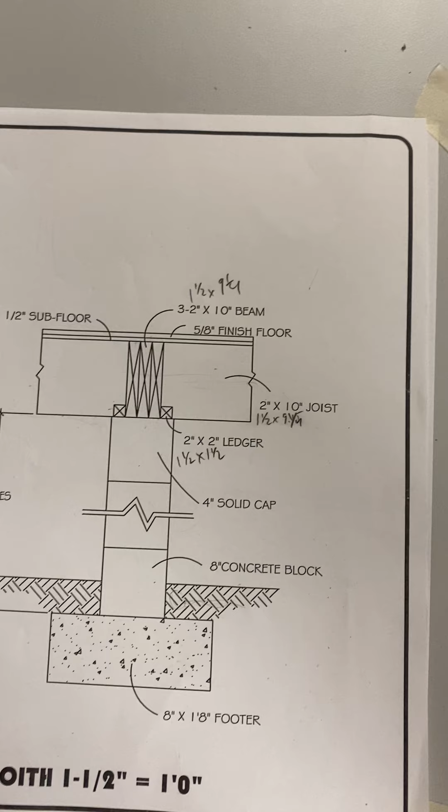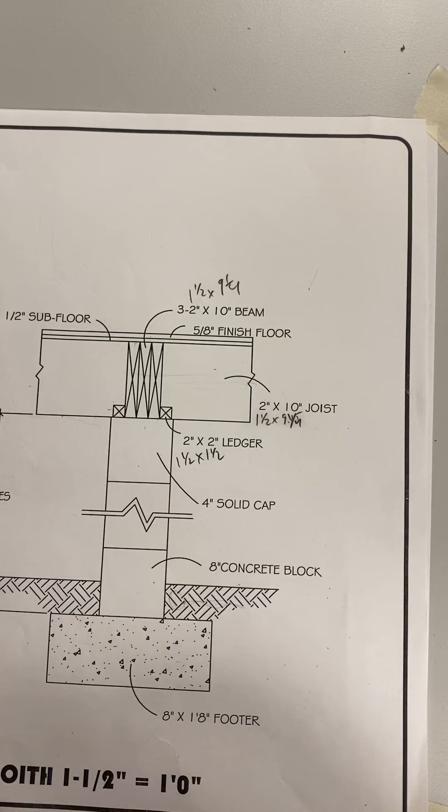So here's the basic overview. Number one, this is drawn 1 1/2 inch to a foot. So you will use, find it here, there it is, this side of a ruler right here, okay? Now, lucky for you, this matches up to exactly 1 1/2 inch to a foot.

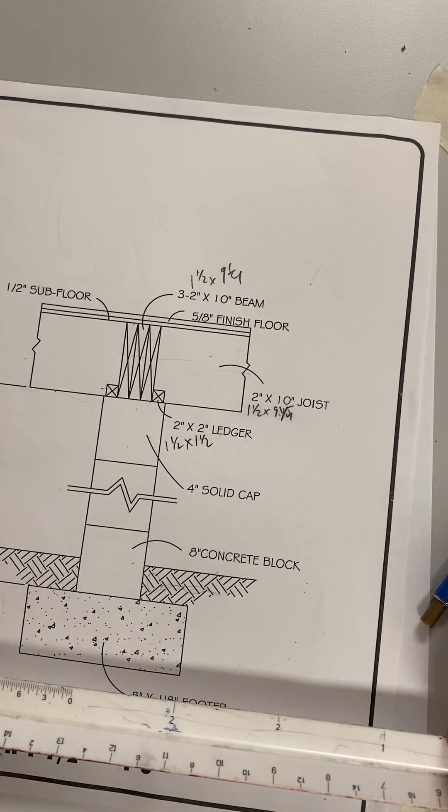So this is scaled. For example, this says this is 1 by 8, correct? We're all agreeing with that. This is 8 inches by 1 foot 8 inches. And if I measure it, it is exactly 1 feet 8 inches. Remember, this 2 is actually a 1 because this is referencing a 3-inch scale, so this is 1 right here, if you do not remember that, okay?

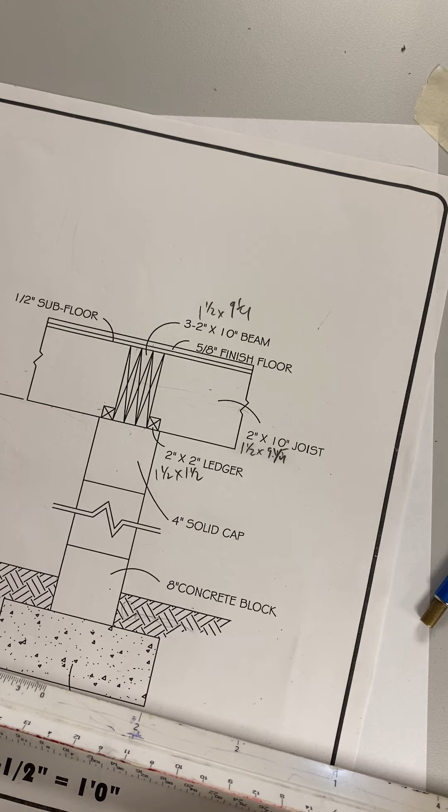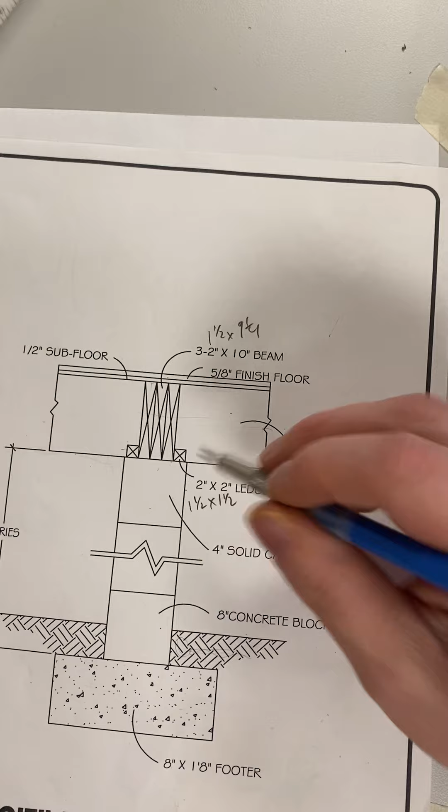Second thing is this: some of these things are not what they seem, okay? In the world of construction and architecture, a 2 by 4 is not really 2 by 4. If you measure it, a 2 by 4 is actually 1 1/2 by 3 1/2. So with that being said, if you measure this ledger right here, you will see how this is actually 1 1/2 inches.

So this is 1 1/2 by 1 1/2. If we're referring to a joist, this is actually 9 1/4 inches, okay? These are going to be 1 1/2 inches wide.

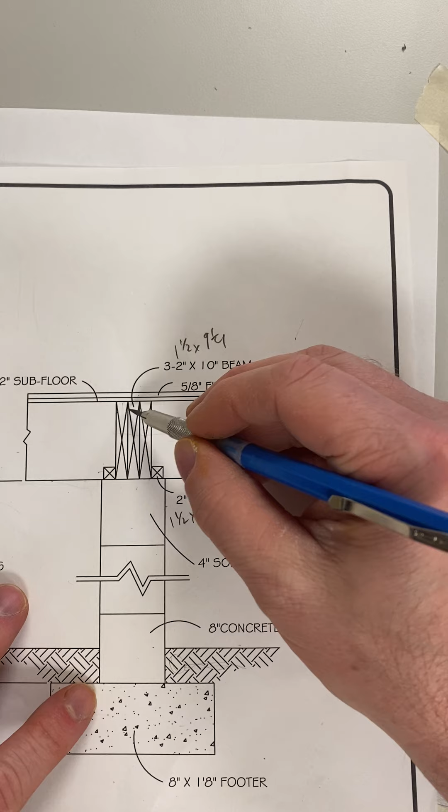So worst case on this drawing, you could reverse engineer it. In fact, you could actually lay it underneath your paper and get the point on that one and almost trace it out. Here's the goal: I don't care about the little hatching right here, that doesn't matter to me at all. We're going to draw this out and label it.

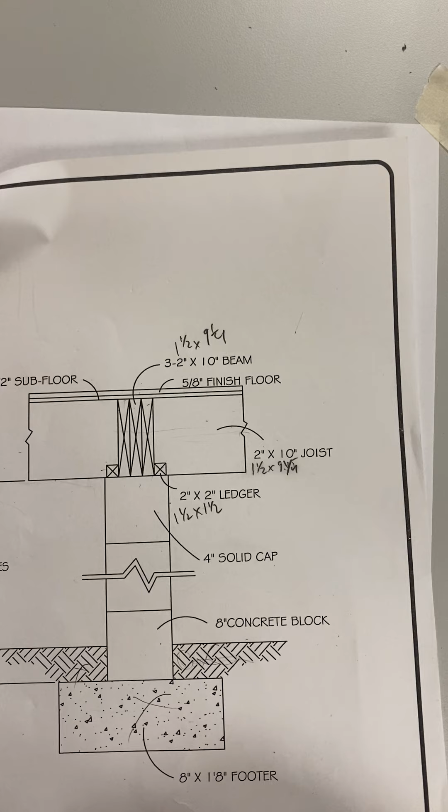So I'm going to do this with you, and hopefully this will help guide you through this. Or if you're like, Royth, I got this, I don't need your help, do it, turn it in, we'll be good. All right, so here we go.

So first thing I'm going to do is start off with this footing, which is 8 inches by 1 foot 8 inches. So let me get everything set up here, do some stuff on my desk. Here's what I'm gonna do first.

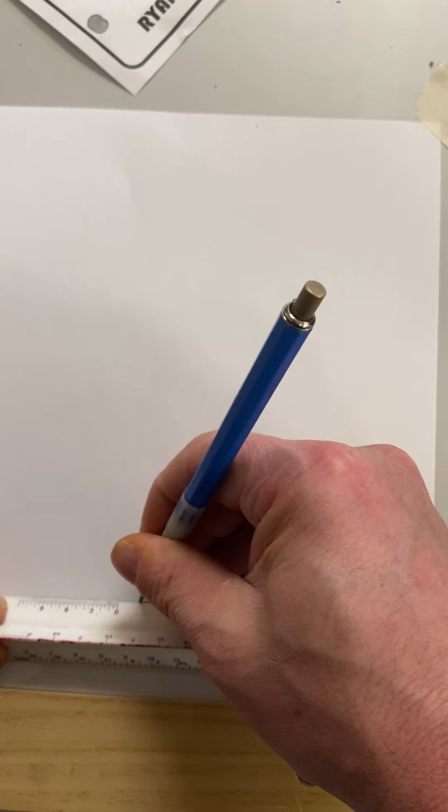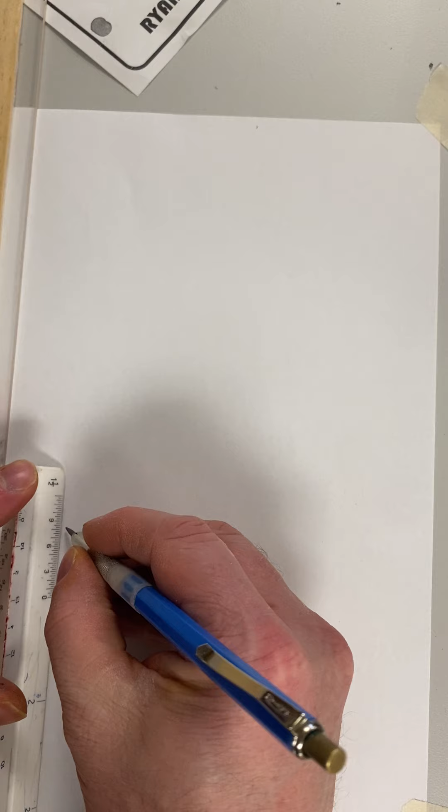You can see this on my phone, yes you can. You're gonna draw a line 1 foot 8 inches first, okay? Go ahead and rotate that with your T-square, and you're gonna go up 8 inches on each side. So there's 1, slide it over, reline it up. There is 2, we're good there.

All right, go ahead, draw a line straight across. It should be about accurate. If it's a tad off, you see my leg kind of got up a little bit there, that is fine, I'm not gonna worry about that. In fact, I'll take my eraser shield and we'll pretend that it's all perfect, and it is. Yep, I got it right the first time, it's 8 inches.

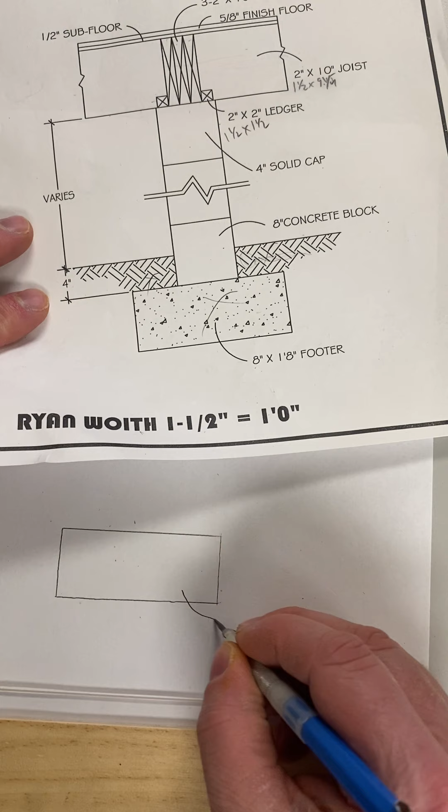So we're good there, okay, so you got this first block done. And if you want to make your life easy while you're doing this, you can go ahead and label it as you go along through it. That way that process is done and you don't have to remember to do it afterwards. Also, the point of this is to learn what's inside of your walls, okay, and what's inside of your floors, or under your floors for that matter.

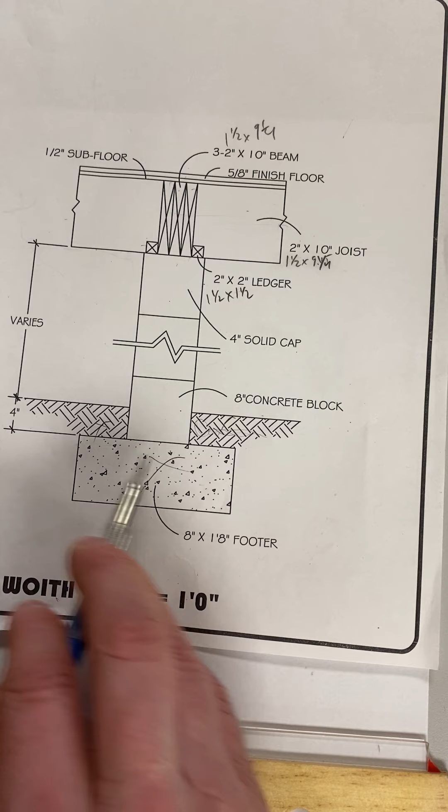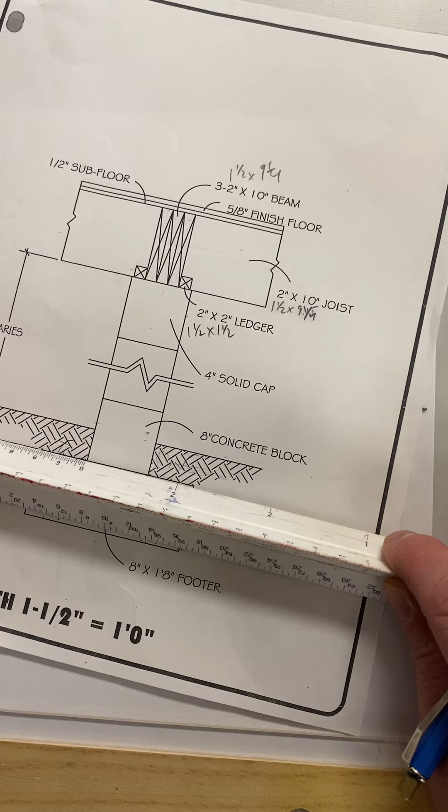Okay, next we need 3 of these 8-inch concrete blocks. Now these are squared, so it's 8 inches by 8 inches. And we have to center them because this is a footing and these are the walls, and they're always centered on the footing, okay? All right, so I know that this is 6 inches going in, and if you doubt me, double check it. I know you don't doubt me, but I just want to show you just so we're on the same page. This is 6 inches long, and this is 6 inches long, so it's centered.

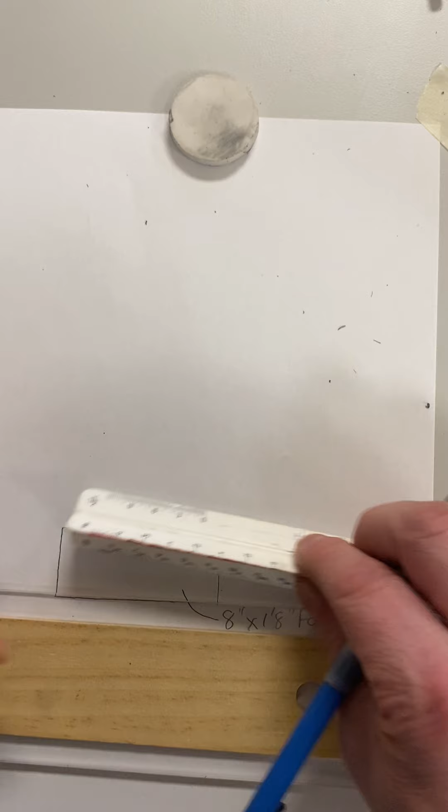So here's what I'm gonna do next, get too many things around here. I'm gonna measure in 6 inches, I'm gonna put a little mark. Measure in 6 inches, I'm just gonna put it on the 6 there and go 0. Same thing, do it backwards. Okay, if I measure here, this is 8 inches, and guess what, it is. All right, so I'm gonna go up 8 inches.

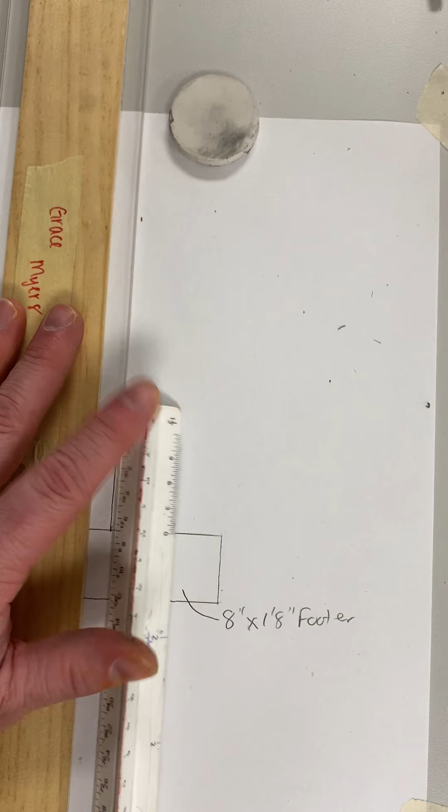Okay, go over here. Go 8 inches up. There you go. All right, take that.

Seems like I go long on the right side. I don't know why that is. There we go. This one doesn't really matter.

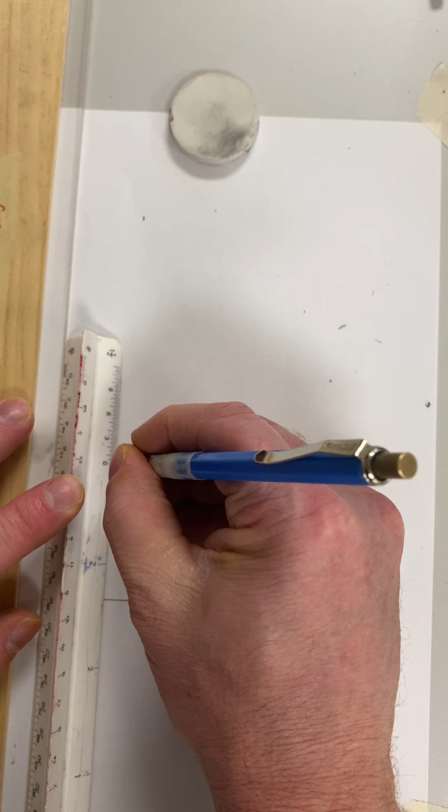So, rinse and repeat, do it again. But I'm gonna do this one a little different because I just want to speed through this a little faster. So, line it up on the 0, go all the way up to the 8. I'm just gonna put a little mark right there, and do it again, just to save myself a little bit of time. That way I know where the top of those things are at.

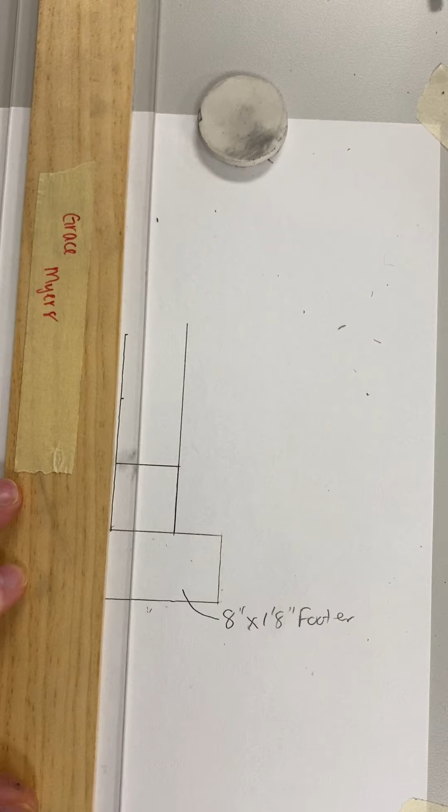Okay, now I'm gonna draw this line up. I will probably have to erase because I'm gonna eyeball it up here, but I'm okay with that because I will save time. Boom and boom. And I never mind erasing, so I will erase this top. And this thing is now rolling pretty good.

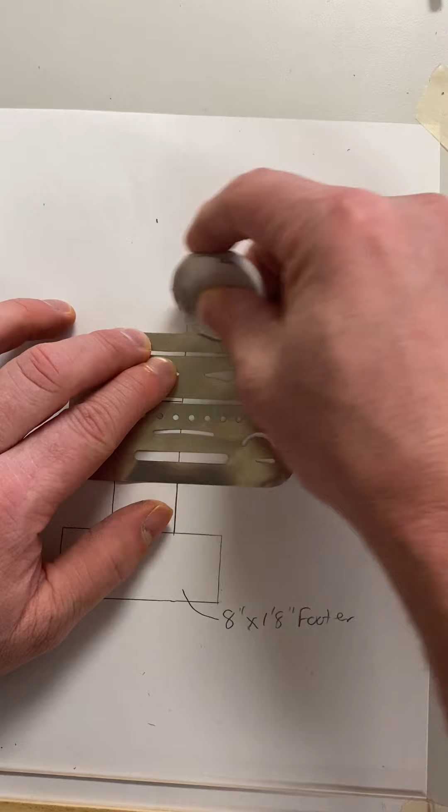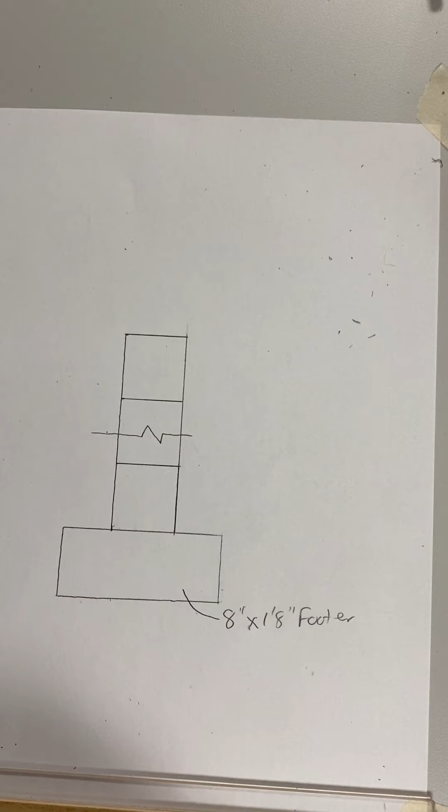Okay, now looking at this, there's this break right here. So I'm not gonna worry too much about the perfectness of the break, we're just gonna put one in here. So breaks can look many ways, but they mainly look like a heartbeat. I'm gonna just eyeball it like that and leave it just like that. Not gonna worry about it being the separation or anything else.

If you want to, you can, if you wanna make it look exactly. It looked better the first time. Good enough, just getting the idea down.

Okay, also we have this right here. This is the ground, also known as the grade. As the grade, I don't know if you heard that or not.

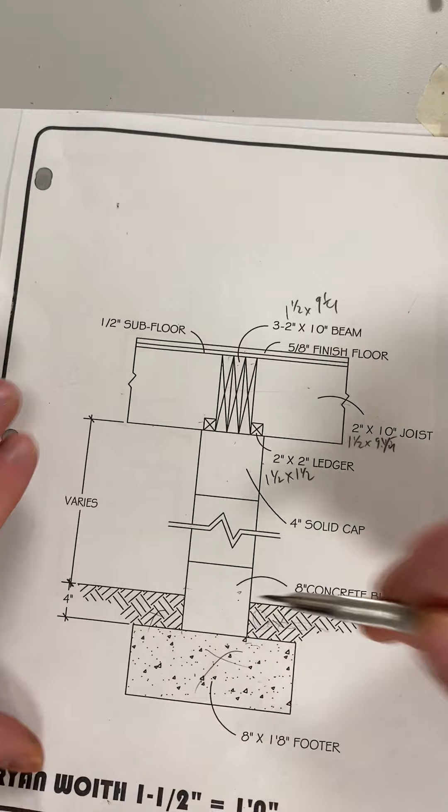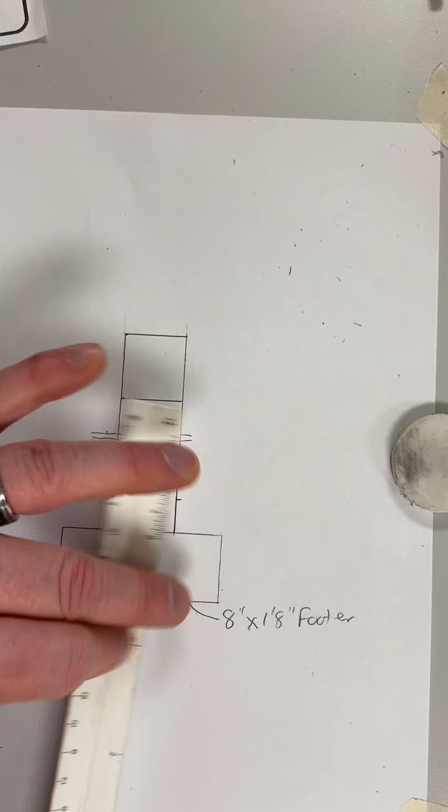So, your next step, 4 inches up from here. Hopefully I'm not going too fast, hopefully you're pausing. Now it doesn't matter how long this line is. I'm just gonna go like this, done.

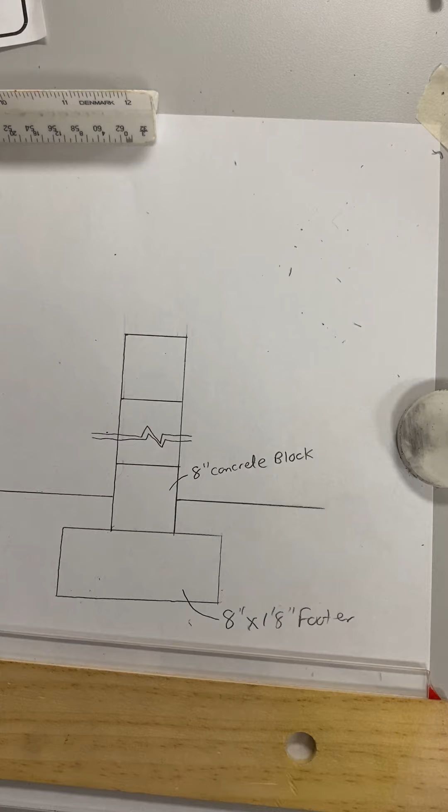Okay, while I'm doing this: 8-inch concrete block. And you better like me because I'm not making you use Gothic lettering, because I'm not gonna do it either. Okay, right here, 4-inch solid cap.

Okay, now we're going to work on what's probably the hardest part about this, which is this right here.

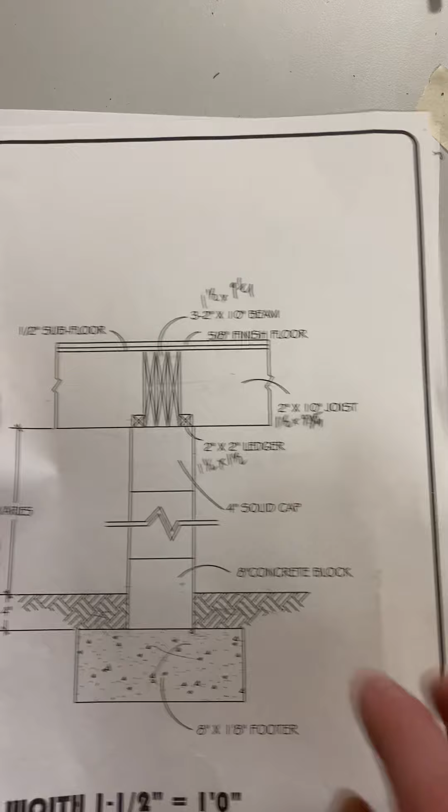So here we go, so I'm going to start with measuring this outside area here first, so that way it looks the same. Now this could go out as far as you want to, it doesn't matter, but I want it to be centered so it's not all over the place. So from here out is about 9 inches.

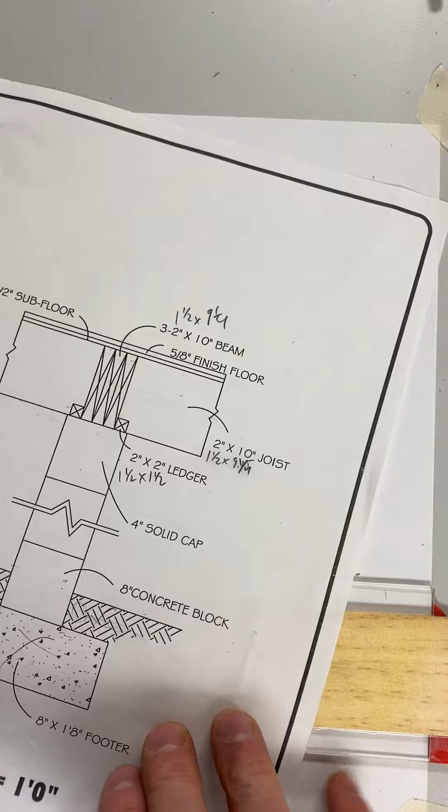I'm gonna go with that. Looks like 9.5, but like I said, it doesn't really matter how long that part is. This is one of the things that it's not that picky about on this one. Okay, line it up, I'm gonna draw a line 9 inches this way.

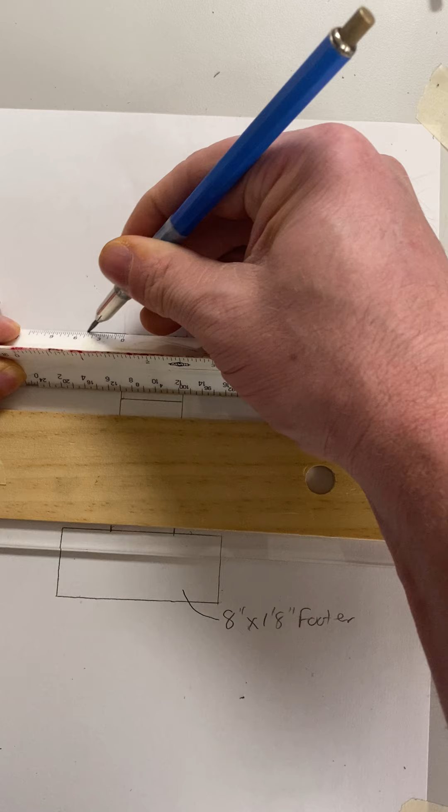Okay, and then I'm gonna go the same thing, 9 inches this way. Okay, so just for reference, I'm gonna put 9 inches right here. That's all for you, no one else.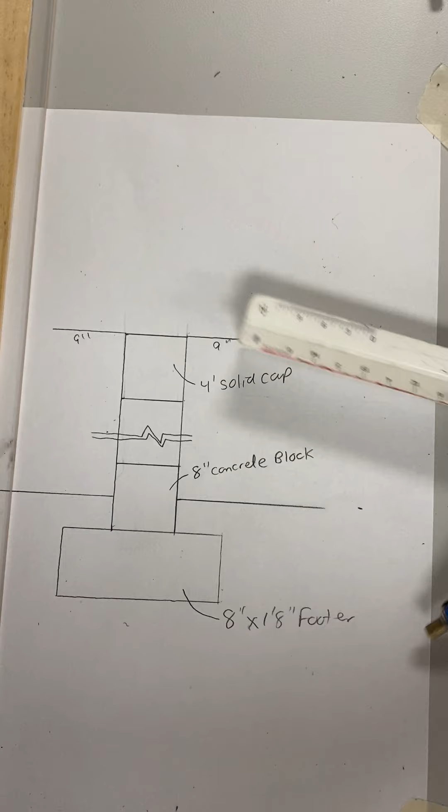Okay, now we're gonna go up. Now I'm gonna do this one a little different so I can put the little squiggly in there, maybe. So this is 9 1/4, okay? Not 10 inches, 9 1/4.

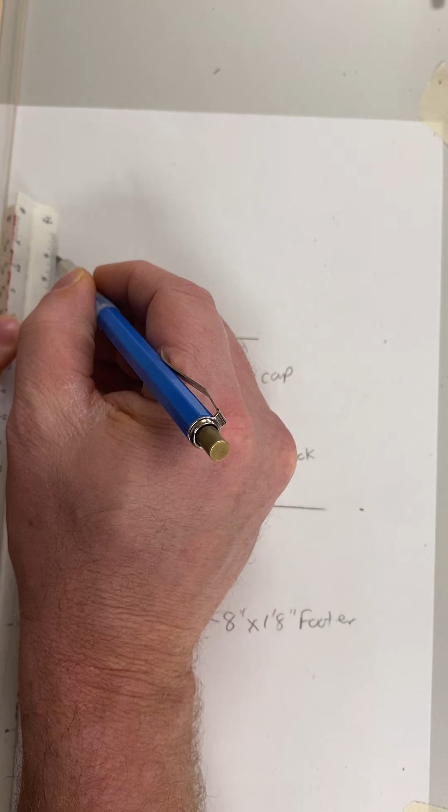So right there, I'm gonna draw lines like this so I can put my little break right there, you see that? Now those match up. Do the same thing on this side, go 9 1/4. Don't know if you can hear it, but the CNC machine's going in the background.

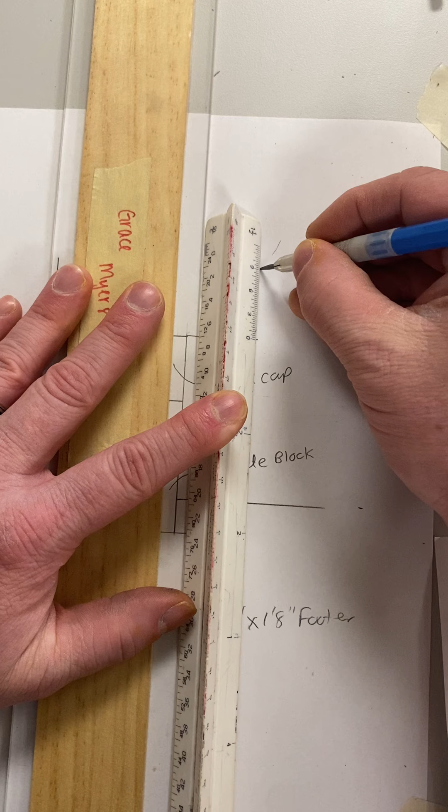Not bad for a Thursday. Okay, I got that straight finally. Draw that straight across, you're doing good. Okay, next thing are these two things right here.

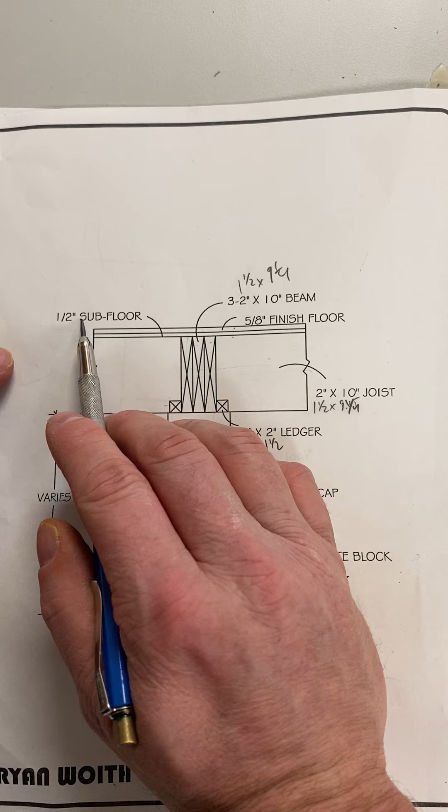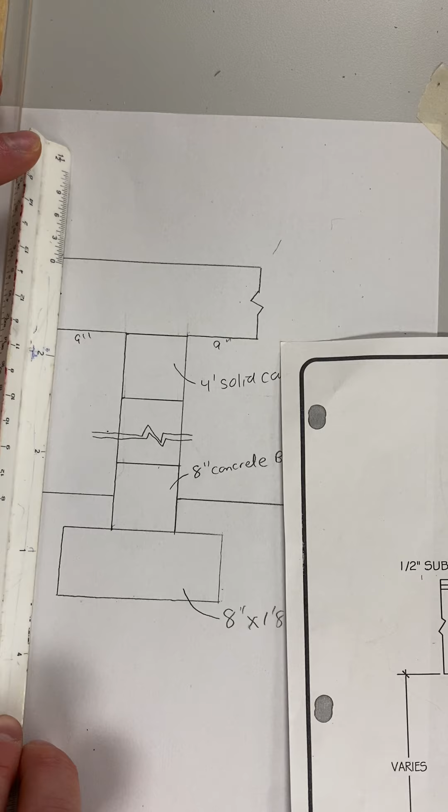Now a 5/8 inch doesn't really exist on a 1 1/2 inch ruler, so I'm just going to make these both 1/2 inches to make my life a little easier. I might try to nudge it up a bit more, but honestly it's not a big deal. The labels are more what matter. So I'm going to make a mark at 1/2 inch. I might try to go a little above the 1/2 inch so I can have a little separation.

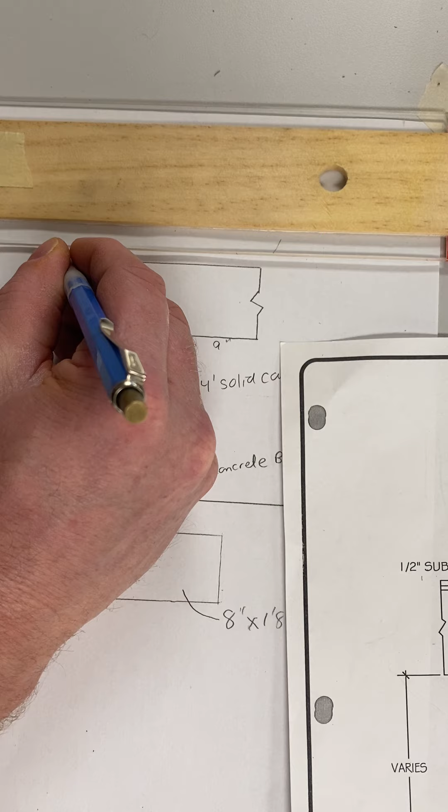So this is going to go up to these, and then I'm going to draw a line straight across. Like that, and like that, and go ahead and join those up here. Okay, looking good, looking real good.

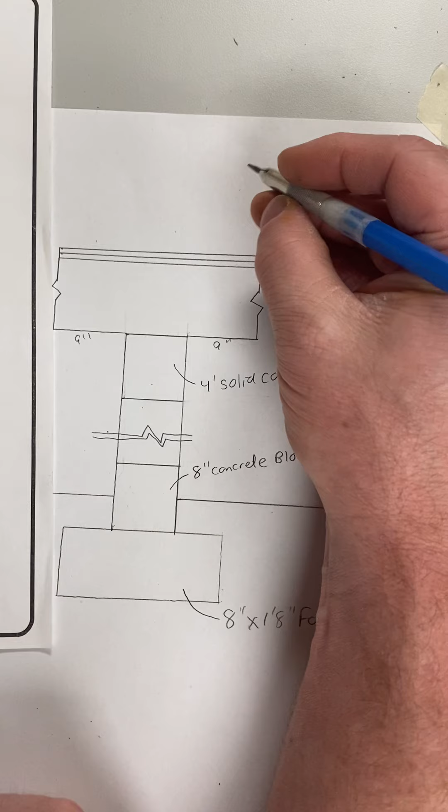All right, so if I want to label it, I might as well do that now. So this right here would be a 5/8 inch finished floor. Remember, you have to label these. Once you start to learn what they are, this here is a 1/2 inch subfloor.

All right, last things are these. Now you might be wondering what the X means. The X is the end of a stud, okay? So if you're looking at a piece of wood, it would be the end of it, not the side. This is the side, this is the end. So you have to put an X to indicate that.

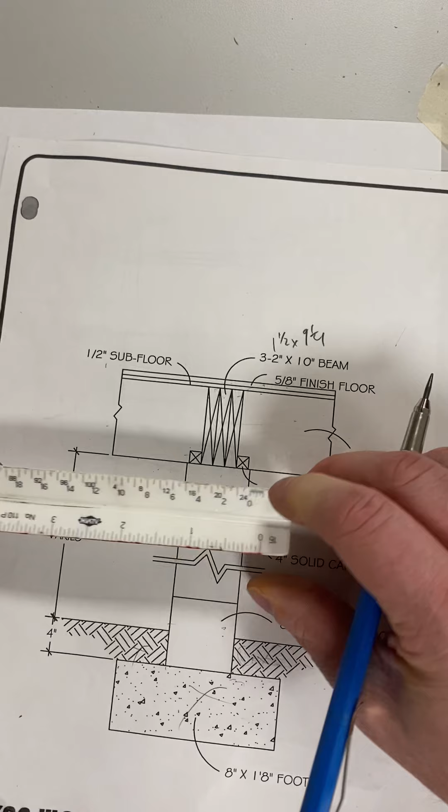Okay, here's how we're going to do this. I'm going to start off, and there's a little bit of a gap here, not a whole lot. I do want to put that in there so it's centered, because if you did it right, it should be centered in there nicely. Of course, this is done on a computer, so it's a little harder. It looks like that is about a 1/4 inch in, so really not a whole lot.

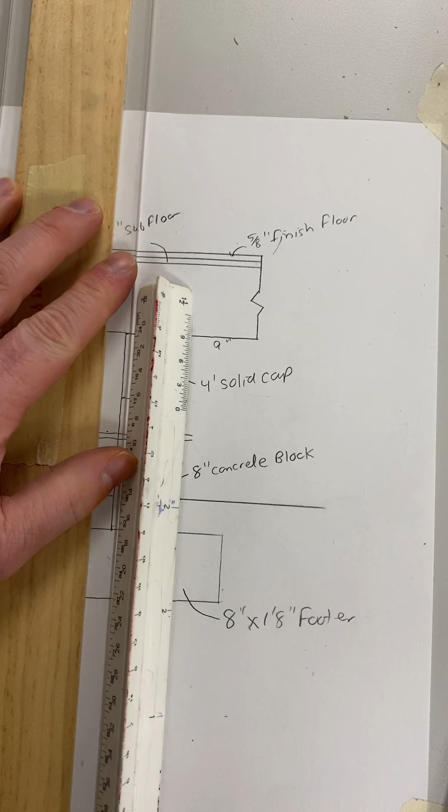So honestly, to make life easier with the thickness of the lead, let's just line it up with this line right here. Because if your lead is any thickness whatsoever, it's going to throw it off a little, so that's fine. So here's what I'm going to do: I'm going to go up here 1.5 inches.

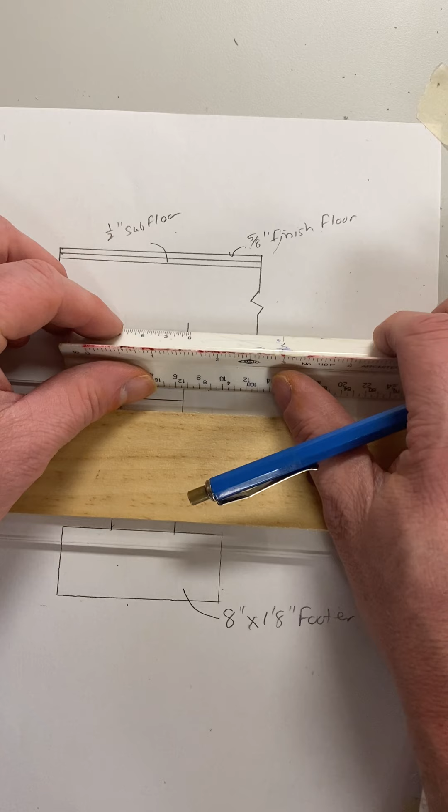Bring that over. Actually, I'll go over now 1.5 inches. Always fun trying to find the side of the ruler. Go over 1.5 inches, because it just takes a smidge to throw that off. Doesn't take a whole lot.

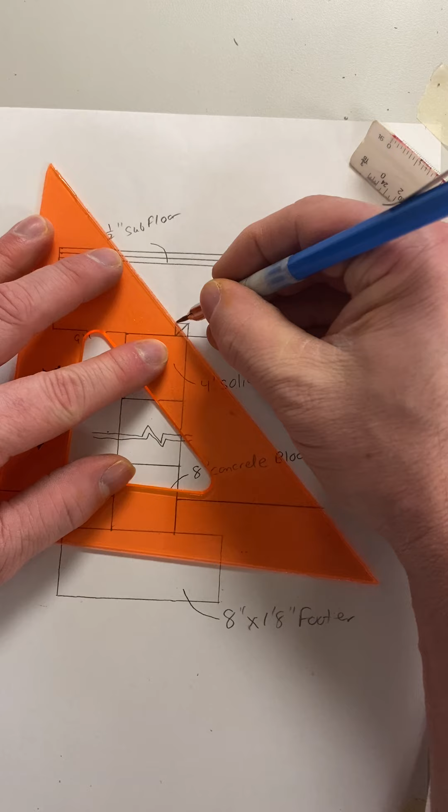There you go. Now whenever you're doing a stud, you have to put an X on it. Why? Because that indicates the end of it. So I like using a triangle because I can see through it, it's very easy to work with. See that? That's how that should look.

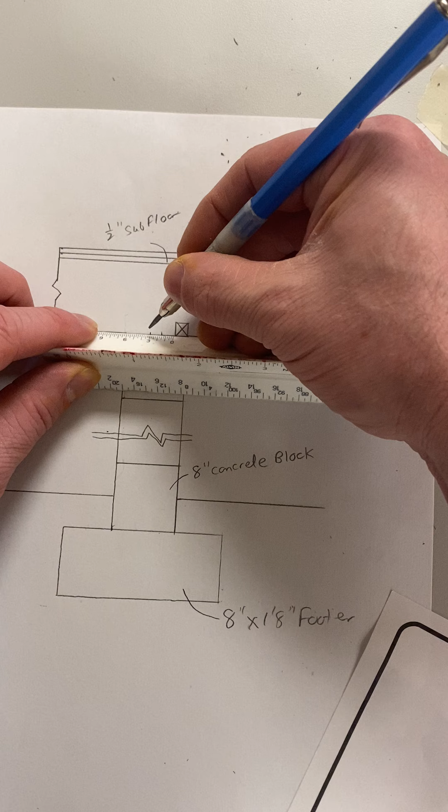Okay, next we need 3 studs here in the middle. That's right, 3 studs. So let's make our life easy, let's just make 3 little marks. I'm going to make a mark on 1 1/2, 3, and then 4 1/2. There we go.

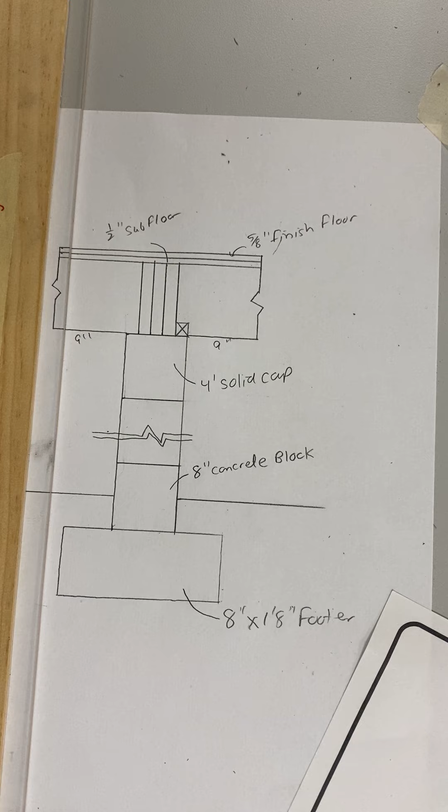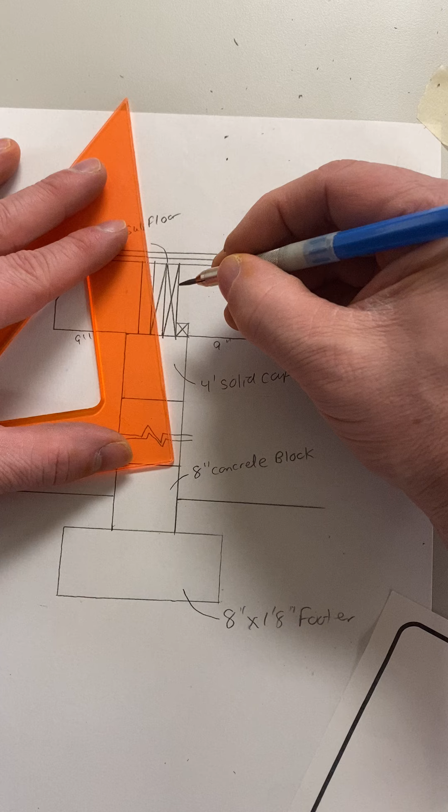Look at that. Now I'm going to take this and draw it straight up to here, and this one goes straight up as well. There we go, nice and pretty. And then while I'm at it, might as well put my little X's in here. There you go, those are actually pretty good. Look at that, nice and even.

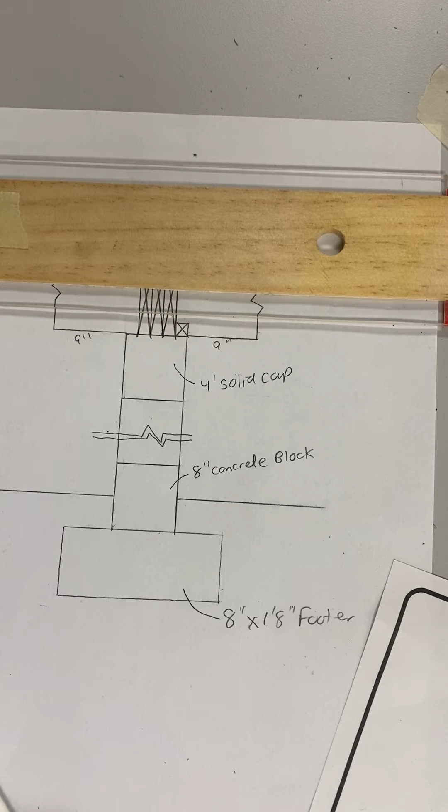Whew, it's a good day to be a drafter. All right, make your life easy. You know this is going to line up here. So I'm just going to take this, since I know these are going to line up, I'm going to find a nice little mark here. So I'm going to put this on 1.5 inches here so I know. I told you this is going to line up right on it.

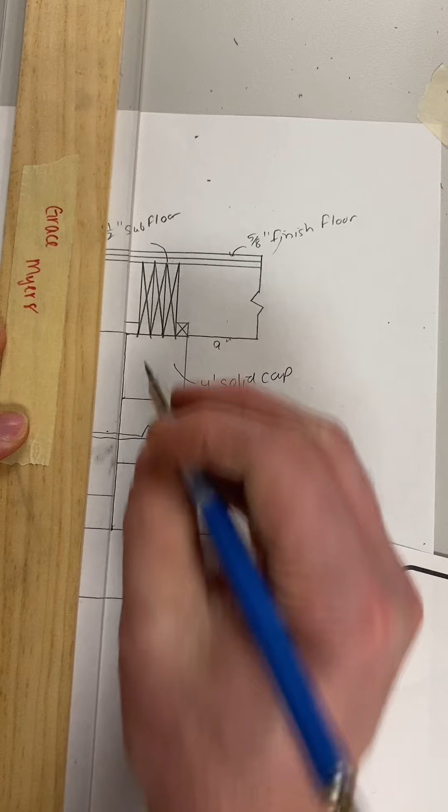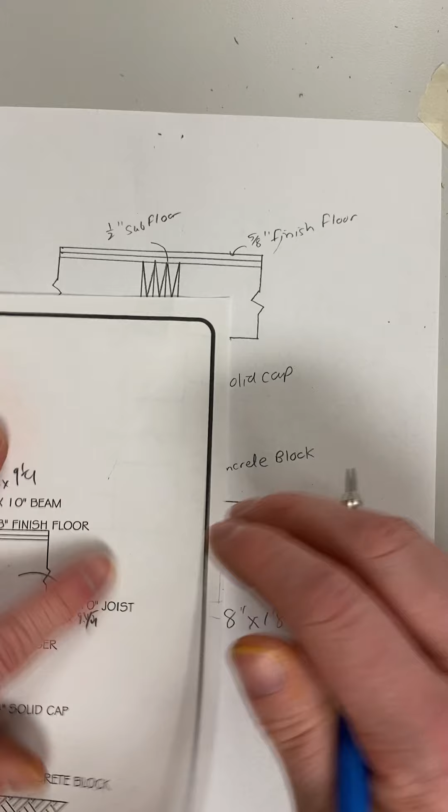It usually does. So right here to right here. Draw your X's. There we go, all right. Last 2 things to do are 2 labels, and we're done. So this is a 2x10 joist. This right here, I'm going to go over here actually: 2x2 ledger.